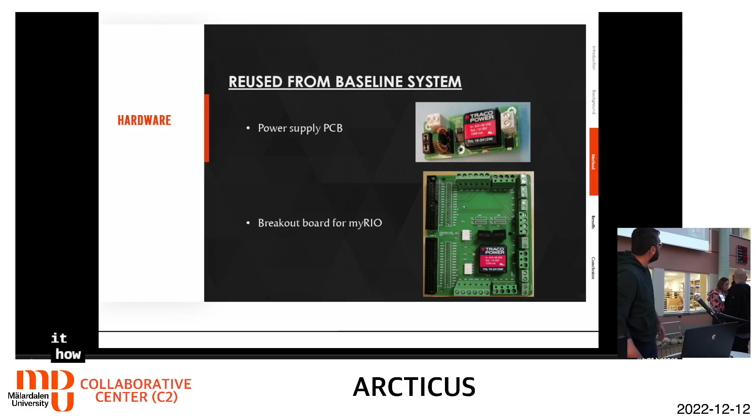So no, that's not, I already finished. Let's say about the background. Yep, we saw it too late. I sent it like 2 weeks ago. Oh no, 1 week ago. Yep, we saw it too late. We saw it today morning.

Okay, let's go. Okay, great. I get in with you. Water, yeah, this is a nice idea to have water here. Yes, 20 minutes is a long time. So you can take the mic in your hand, you know, also, but don't use it to point at things. Okay.

You have a laser pointer here if you want. How does it work? Otherwise, you can have a laser pointer here too. Yeah, exactly. And you can zoom in on things with that one. All right, which button is the laser? It's too advanced, that one. But the problem with the laser, if you turn this way, nobody will hear you. No, what you are saying.

Good luck, guys. Thank you. Hello? You want to raise that a bit? It's a bit low for both of us. Just take it in my hand. This. No? We will stand here. Keep it on the ship. Yes.

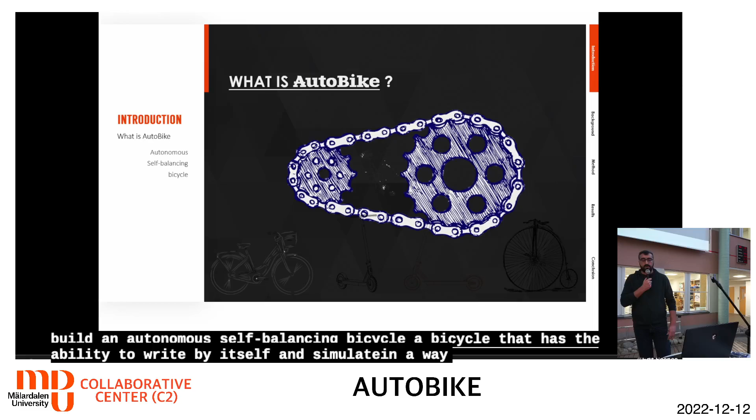You may ask, what is AutoBike? AutoBike is a project that aims to build an autonomous, self-balancing bicycle, a bicycle that has the ability to ride by itself and simulate, in a way, the behavior of a human who rides a bike on the roads.

As a background, we want to see what's the purpose of this project. In fact, the purpose of this project is not the bicycle itself, but rather the use of this autonomous bicycle for traffic safety tests. Our sponsors, who are Volvo Cars, Autoliv, Veoneer, AstaZero, and Cycleurope, already started.

I'll play the video. Sorry. I apologize, but I have a video that should play here. No, it was working correctly. Skip it, well, actually, I have to.

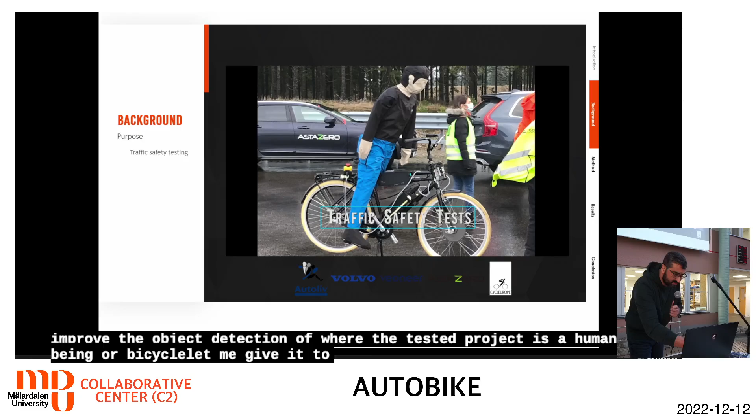Just skip it, okay, so unfortunately the video, I have plenty of videos here, but I'll check how to work. Our sponsors already have started having these safety tests in order to improve the object detection algorithm for autonomous cars, where the tested object, which is a human being or a bicycle, let me give it one more try. Sorry.

No? No, we have time. We have time, the video started in the beginning and then it disappeared. Amazing, can you just try? Oh, it's frozen. No presentation mode, maybe? Frozen. No.

Here, wait, don't click. No? No, this, that's a slideshow. Okay, this is the one that was started. But let me try here, because I really want it.

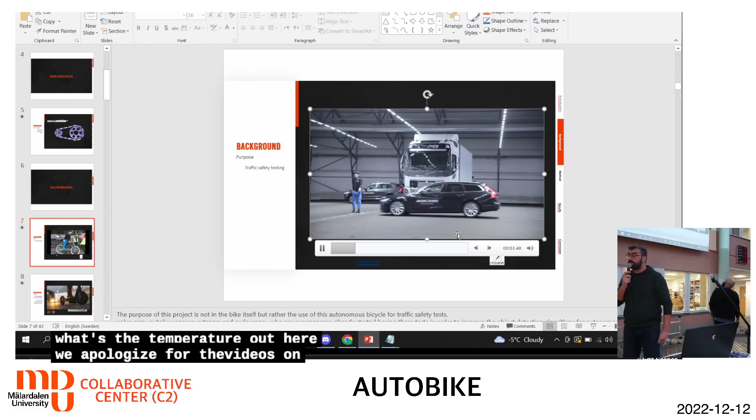We apologize for the videos, I'll play them like this. I hope you can see them. So the object was following a straight line. However, with AutoBike, the bicycle can move freely in different directions or a non-line path. So this will simulate better the behavior of a human being who rides a bicycle. Back to the presentation mode.

Please, yeah. So a number of previous autonomous bicycles have been created over the past few years, and many of them are operational, where their design has been improved continuously through the past years. And this here behind me, the green bike, I don't know if you see well the colors, this green bike is actually the most recent bicycle that has been

implemented as a collaboration between Chalmers and Mälardalen universities. However, the increasing number of e-scooters and riders of e-scooters on the roads has given the motivation to our sponsors to expand these tests and include the e-scooters for traffic safety. So it became really a necessity, even for autonomous cars, to detect the e-scooters and behave conveniently.

So in order to understand, or wanting to understand, let me play the video again. No, okay. Sorry, it will take them.

There was a video here where we wanted to understand how the bicycle will balance, to understand the basics of the dynamics. A silly question here is why, when we push a bicycle without a rider, it can maintain its balance for a good distance. Actually, it is the momentum that gives it the ability to maintain its balance, and whenever this ability is neutralized by gravity, it will fall.

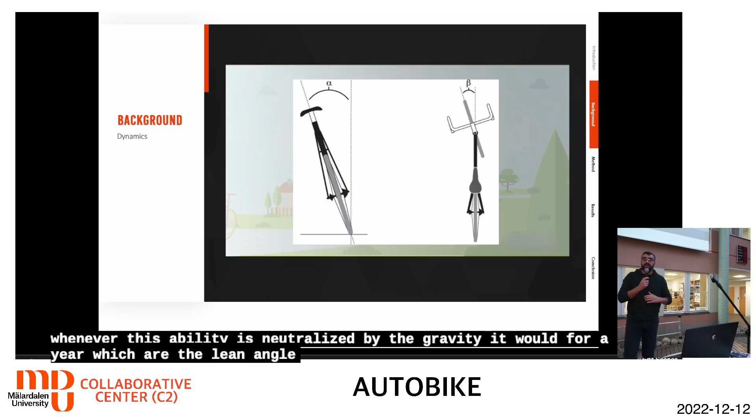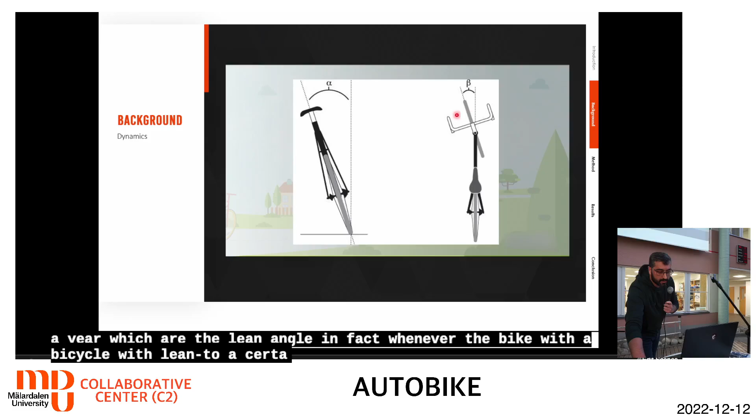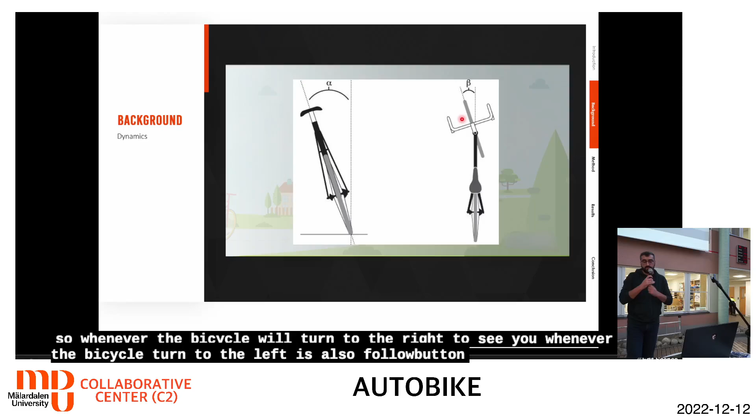There are two parameters here: the lean angle, and the steering. Whenever the bike or bicycle will lean to a certain direction, the steering will follow. So whenever the bicycle turns to the right, the steering will turn to the right. Whenever the bicycle turns to the left, it will also follow, but only until a certain degree. When the speed, the momentum that it has, is neutralized, it will not maintain its balance.

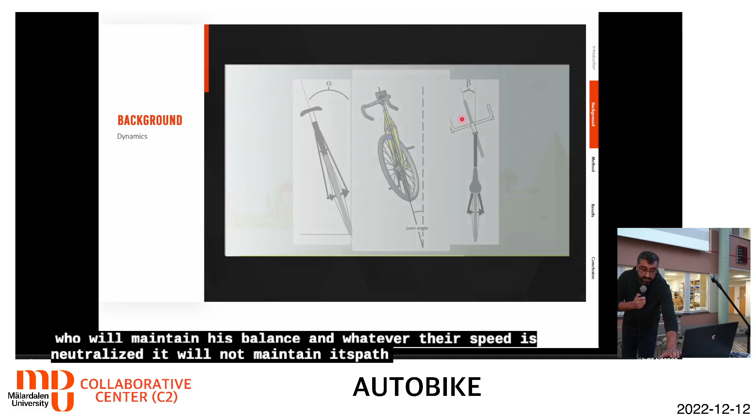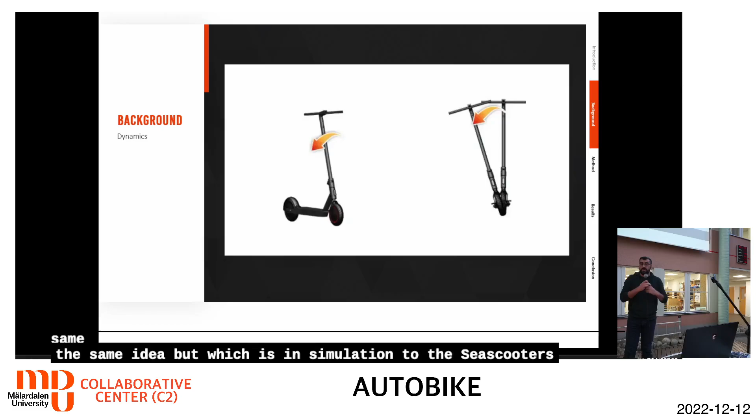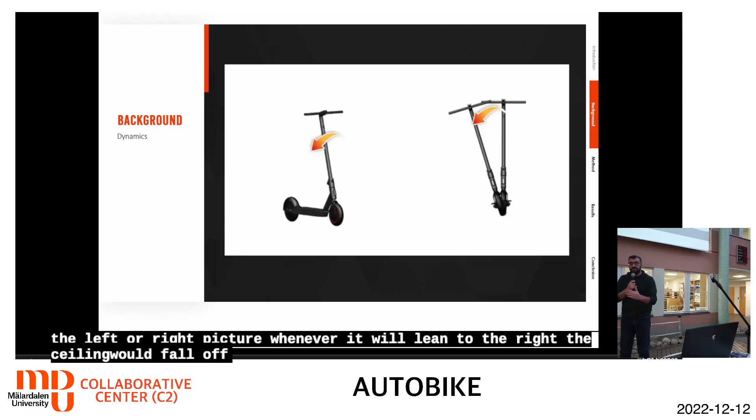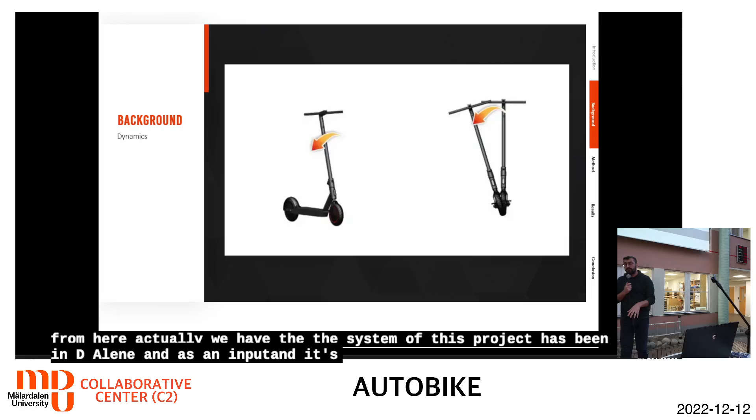There is another video here with the same idea, but in simulation with e-scooters. Whenever the e-scooter will lean, as you can see in the angle on the left, in your right picture, whenever it leans to the right, the steering will follow in order to try to maintain its balance. From here we have the system of this project: two parameters mainly, a lean angle as an input and a steering angle as an output. We want to control the balancing dynamics of the bicycle via these two parameters.

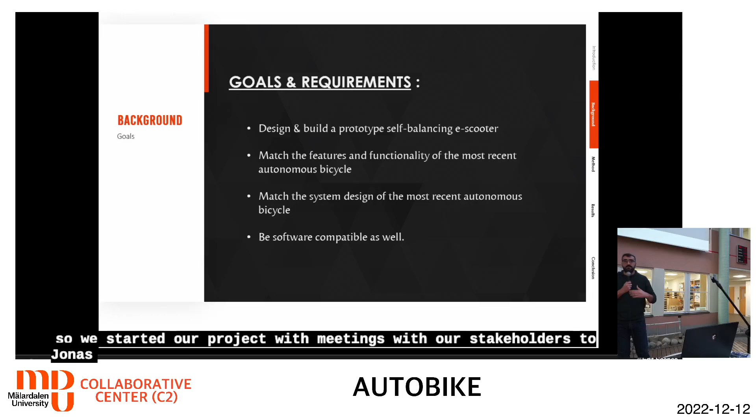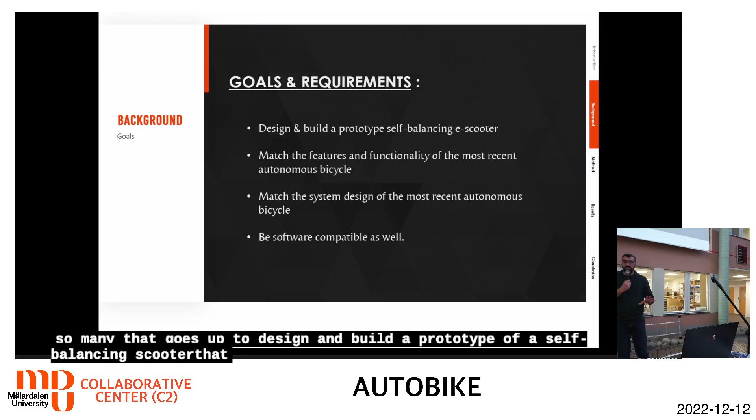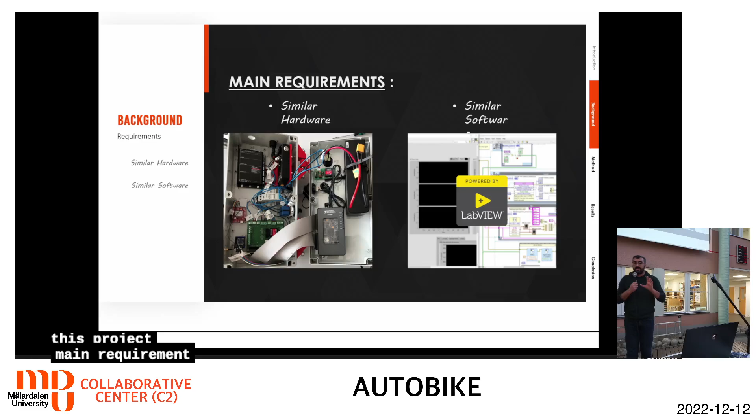We started our project with meetings with our stakeholder, Mr. Jonas, who gave us the goals, directions, and requirements of this project. The goals are to design and build a prototype of a self-balancing e-scooter that matches the features and functionalities, in addition to the system design of the previous existing bicycle that we have already shown. A main requirement is to maintain similarity, not to say the same, but similar hardware and similar software to the existing bicycle, and we want to investigate if this applies on the e-scooter or not.

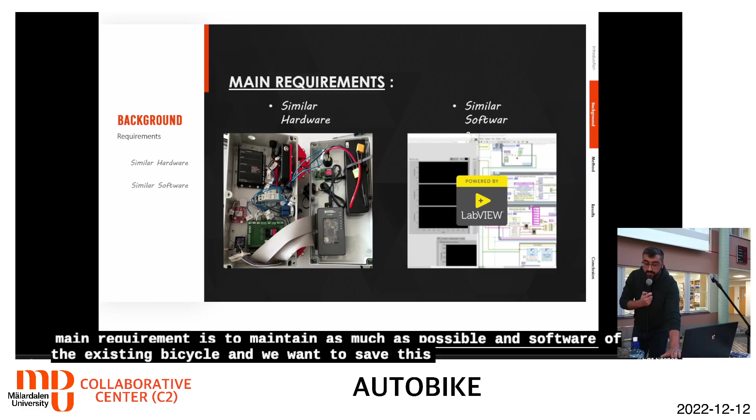From here we will jump to the method, with my colleague Linus.

One of the first considerations was picking a scooter to use. It's reasonable that it should represent what's most commonly seen in traffic - what's popular, what do people actually ride. But we also wanted something practical, easy to work on, easy to disassemble, that doesn't use lockdown hardware or is filled with epoxy or anything like that. Looking at what's common, rentable scooters are everywhere, different brands, but they all look about the same.

We actually got in touch with all of these brands, and I think one replied - it was basically a thank you for your interest. Nobody else even replied to our emails. So that's out.

Xiaomi and Ninebot - if you look at the market of what's available, 8 out of the top 10 most popular e-scooters sold in Sweden are made by Xiaomi, so it appears to be popular. One of the other two is Ninebot, formerly Segway, which is practically owned by Xiaomi. They invested in them as a startup, so they share a lot of hardware, they're almost the same.

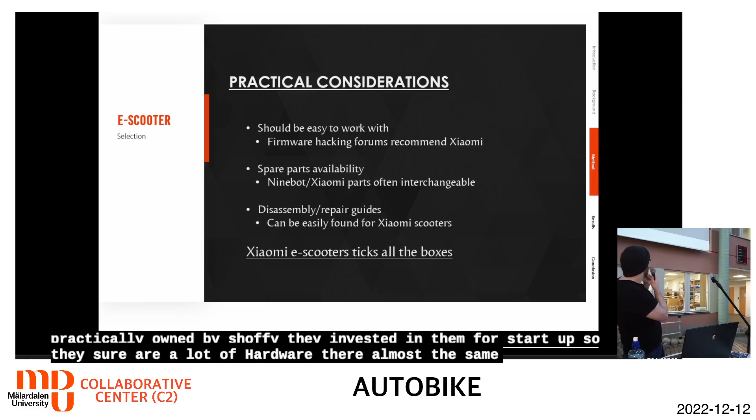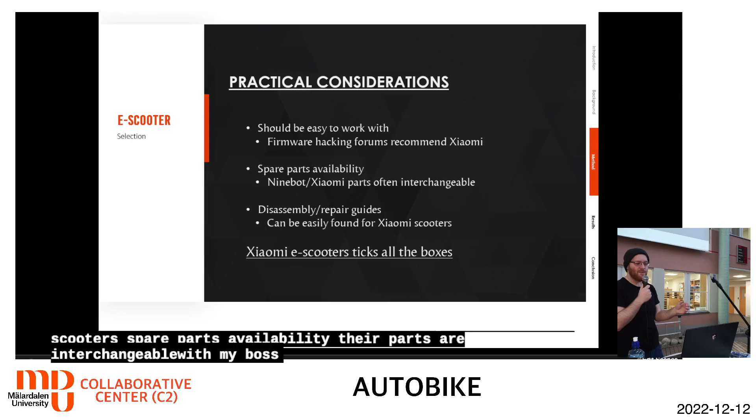Practically, there are online communities dedicated to hacking the firmware on e-scooters to unlock the speed and make them go faster, and all of them recommend Xiaomi scooters. Spare parts and availability - their parts are interchangeable with Ninebot, they're sold everywhere, you can find them on eBay, and disassembly guides are available. So Xiaomi scooters seemed like the way to go.

And this is the one we picked. Notably, this one isn't legal to ride on the road in Sweden anymore because it has a 300-watt motor. Doesn't matter for us, we're just testing stuff. But that also meant it was discounted and cheap.

We wanted to reuse as many parts as possible. So the front hub motor and the battery, which is located in the bottom compartment, is 36 volts, which turned out to be a bit of a problem, but I don't know if we included that.

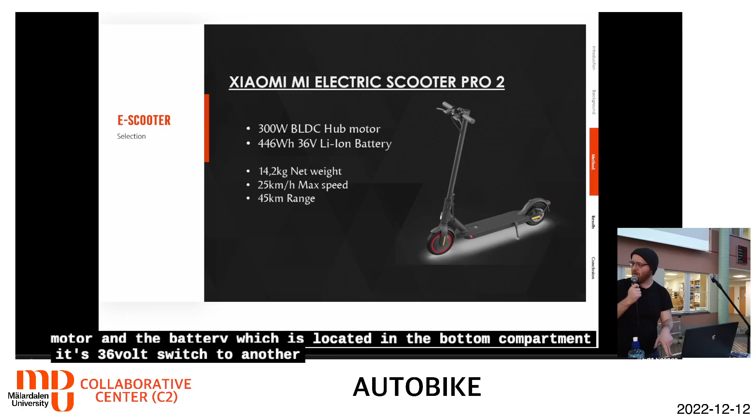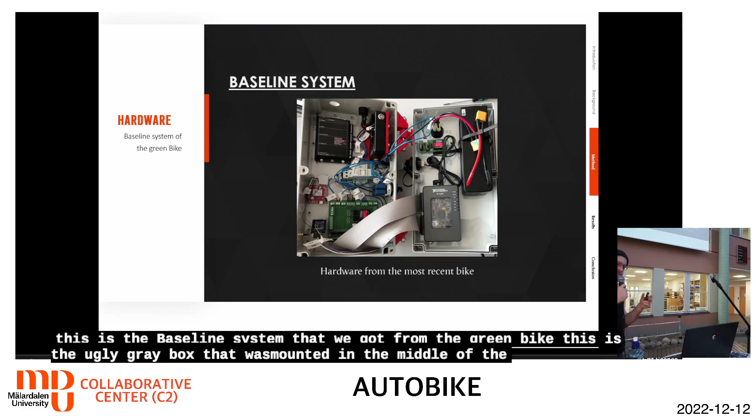This is the baseline system that we got from Chalmers, the green bike. This is the ugly gray box that was mounted in the middle of the frame in one of the earlier pictures. This is the similar hardware they wanted us to use. If you think it looks like a bit of a mess, I agree, but this is what we were told to follow.

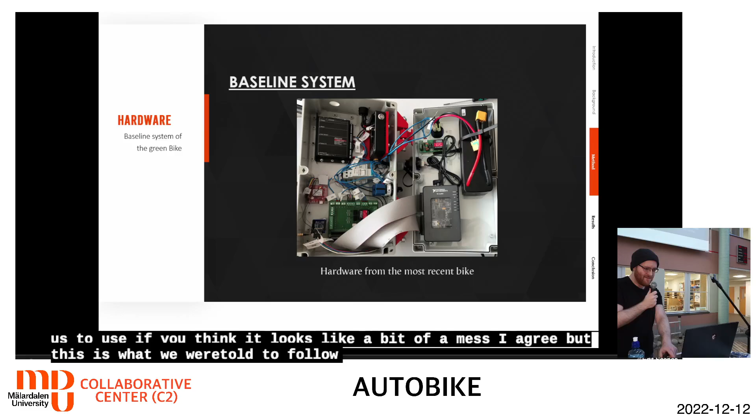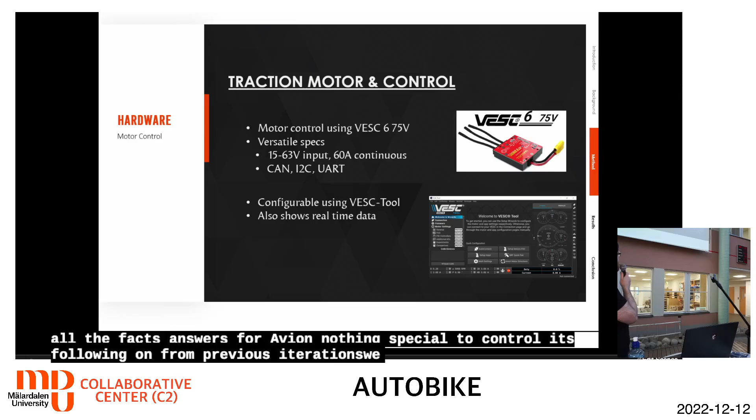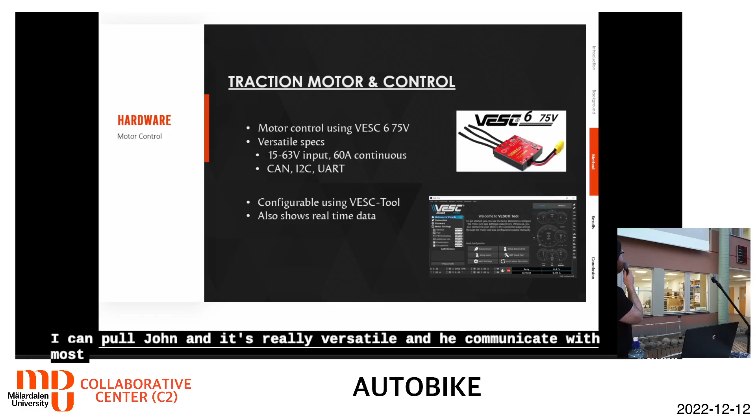Motor, like I said, we reused it. It's a 300 watt brushless DC motor, has Hall effect sensors for RPM, nothing special. To control it, following on from previous iterations, we used this lovely speed controller here, VESC. It's an open source project by a guy called Benjamin Vedder, not the guy from Pearl Jam. It's really versatile, you can communicate with most anything you want to use, and it has a wonderful tool that you can configure it with via USB. It's awesome.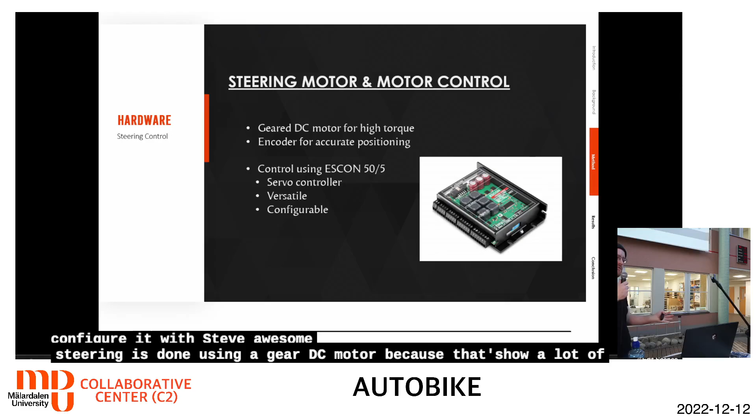Steering is done using a geared DC motor because it has to have a lot of torque to overcome the forces when it leans to countersteer.

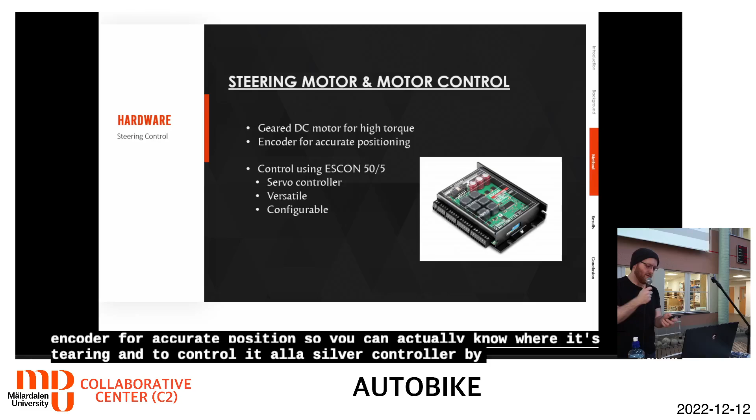With an encoder for accurate position, so you can actually know where it's steering, and to control it all, a servo controller by a company called Maxon, which again is really versatile and configurable via USB.

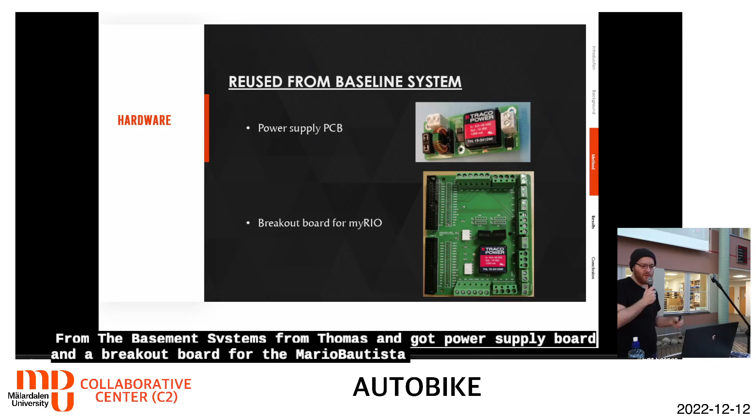From the baseline systems from Chalmers, we got a power supply board and a breakout board for the myRIO, which is the brain of the whole thing, which they were kind enough to provide. Although, as it turned out, the breakout board was the wrong board version, so it didn't actually work properly.

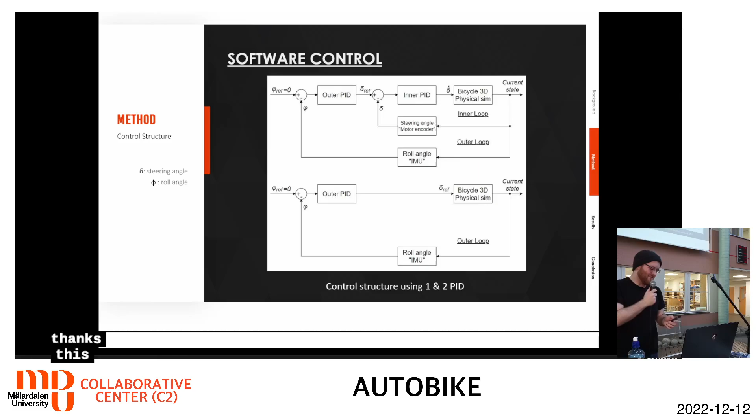This is the main control. This is how the steering is controlled. This is how the whole system really is based. You have sensor data coming in, and then you use a PID to correct for it.

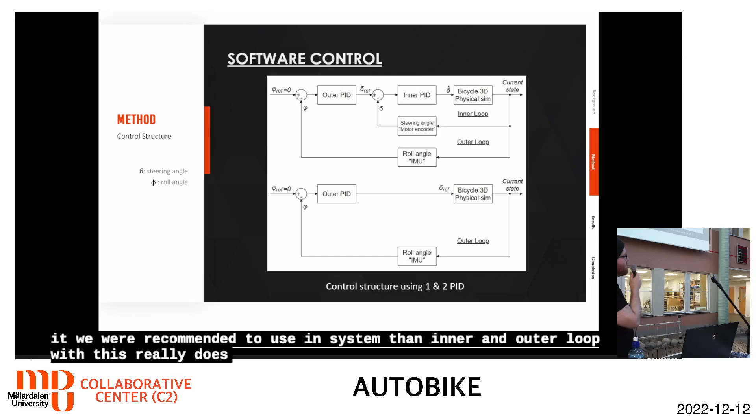We were recommended to use a system with an inner and an outer loop. What this really does is it runs multiple iterations to try to correct for every new sensor value that it gets. The outer loop updates slower.

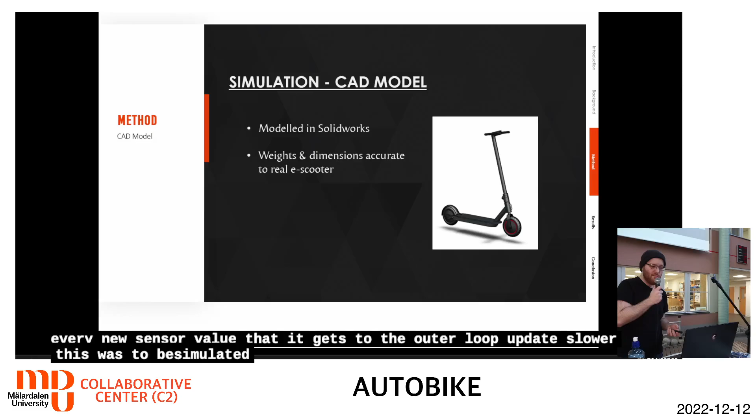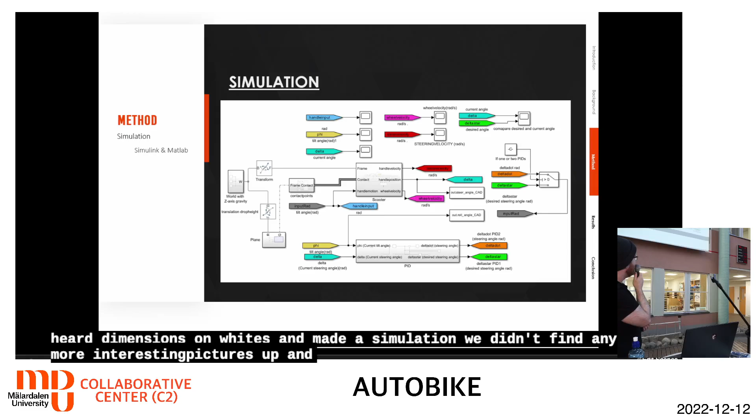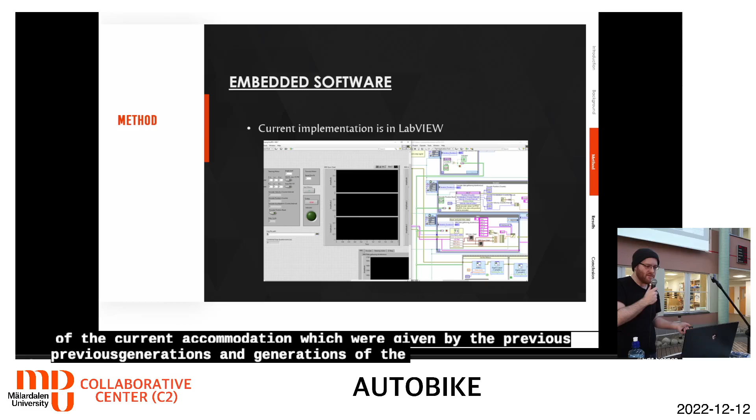This was to be simulated, so we modeled the scooter accurately with accurate dimensions and weights, and made a simulation using Simulink and MATLAB. You'll see them now. The embedded software really is just a continuation of the current implementation which we were given by the previous generations of the project, implemented in LabVIEW because we're using National Instruments hardware, so no choice there.

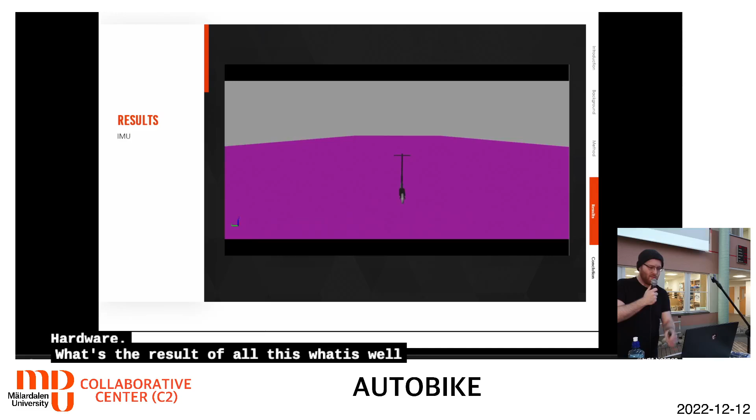Yeah, what did I say? Whatever. What's the result of all this? What came of it? Well, we had trouble playing the videos, but this is a lovely video of the simulation, physical simulation, which, do we want to try to play it or skip it? We can show it later.

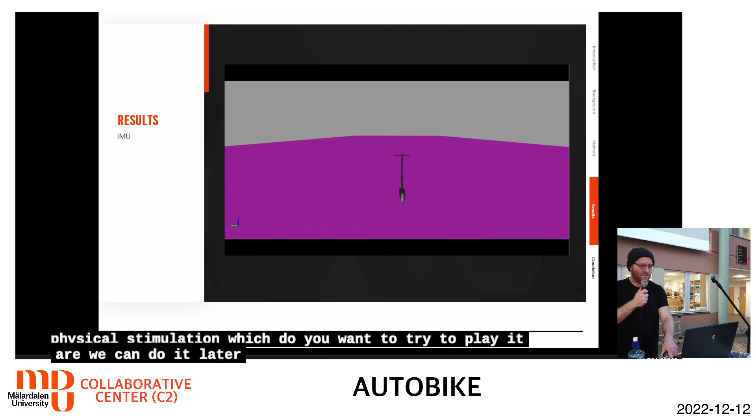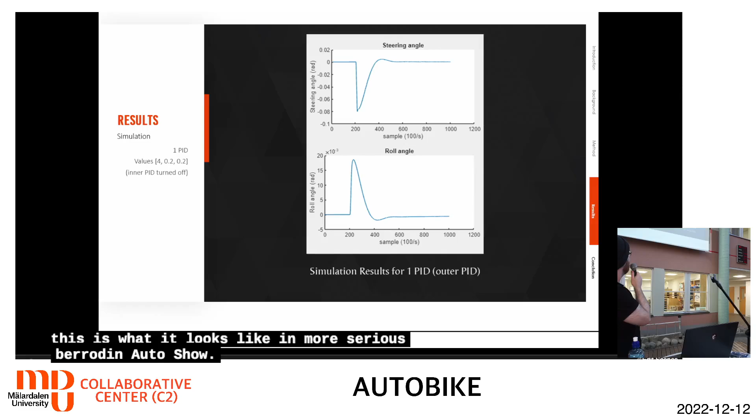Basically, it gets pushed to the side a bit, and we see that it maintains its balance and corrects. This is what it looks like in more serious data than a video. Show steering angle getting nudged to the side, and the roll angle getting pushed to the side, and it steers to correct. This is using a single PID.

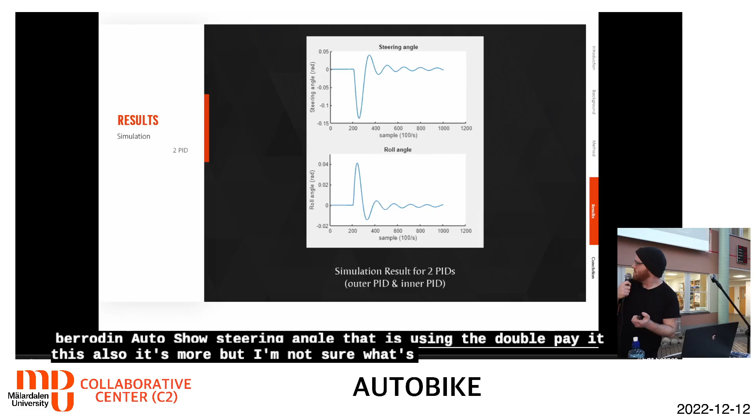This is using the double PID. This oscillates more, but I'm not sure why. The result with one PID is better now, but these are results from simulations, not real-life testing.

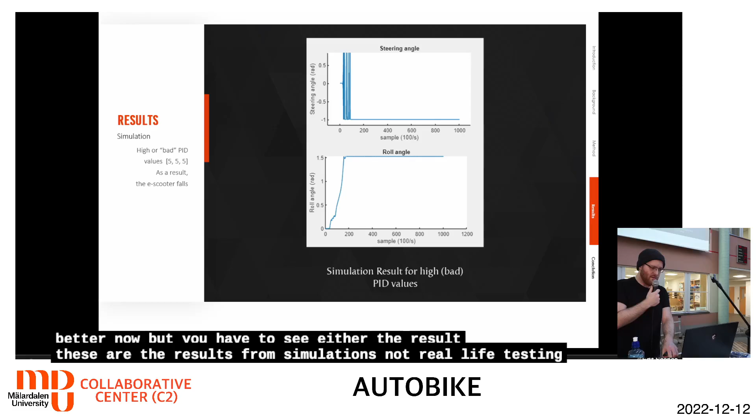We'll get to that. And this is what happens when it doesn't work. The roll angle goes right off to 90 degrees because it's fallen over. And now, this we do want to see. This is the result. We can show it later also if you want, but now.

That's the whole point. This is the IMU. That in its hand is the IMU, the sensor. It senses acceleration, gravity, etc. And when it leans to the left and to the right, the steering counteracts.

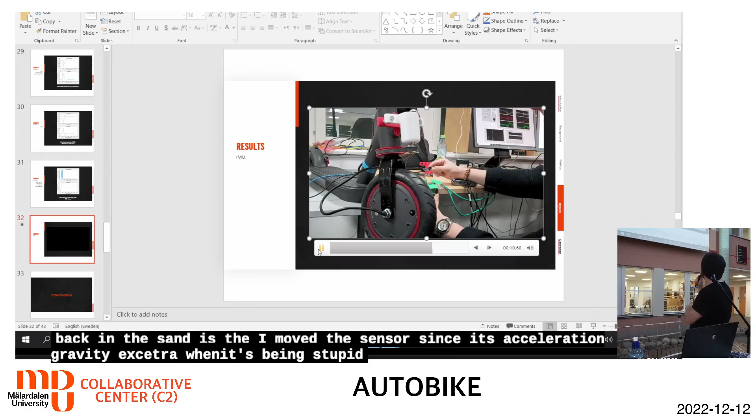That's all we got so far. We still have a week of implementation. We were hoping this would be on Friday, not Monday. To conclude.

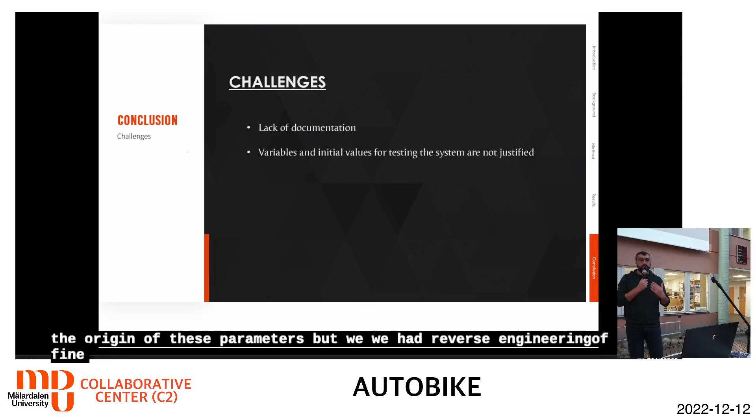So back to the conclusion, where actually there were some challenges that we faced, including some lack of documentation, where there are plenty of variables or parameters, let's say, that we didn't find the origin of. But we had reverse engineering in order to find most of the variables. There is until now a lot to test, to verify, to validate, but we hope that we will have enough time during the next week.

And as future work, actually validation and verification of the system on the e-scooter is still ongoing, and perhaps with future generations there will be a lot to test and to validate.

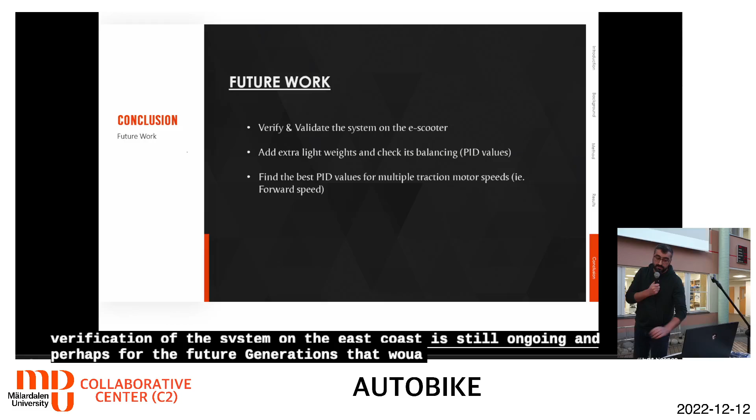Also, an extra lightweight or extra mass that should be implemented or placed on top of the scooter will help verify what the different values of the mass of the scooter should apply. Is there a limit or not?

And also, whenever we increase the speed of the scooter, there will be a change to have multiple variations of the PID values. So when my friend showed the visualization of one PID or two PIDs, there are plenty of combinations. We are trying to find the optimal combinations until now. Maybe it will take a long time, and the algorithm will be very heavy, let's say. But we want to see if the PID values will apply, or how the PID values will change when the speed changes.

Until here, we reach the end of our presentation. Thank you very much for your listening, and feel free to ask your questions. Thank you.